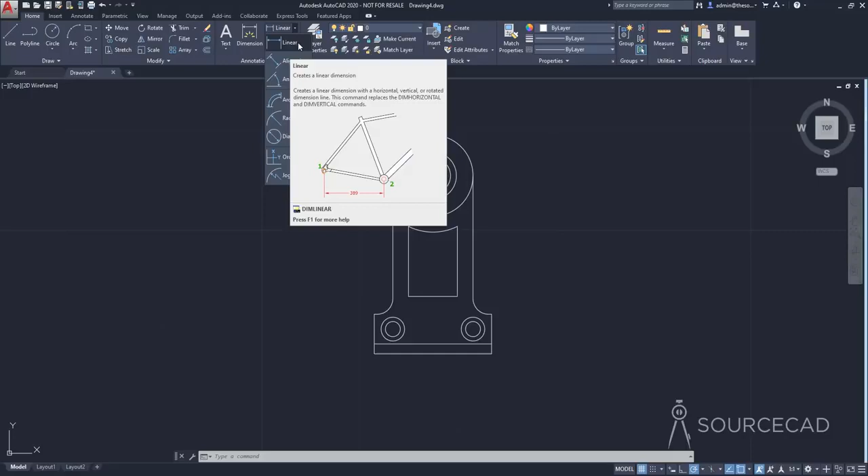I'll start with dimensioning because it's very important in any kind of drawing. To dimension this drawing which we made earlier, I'm going to go to the annotation panel, and right here we have the tools for dimension. You can use this dim tool or the dimension tool, or use any of these existing tools. I'll make the very first dimension using linear. I'll go to linear and add a dimension here. To add the dimension, all you need to do is select the first point, second point, and a point where you want to drop the dimension, and you'll have the dimension like this.

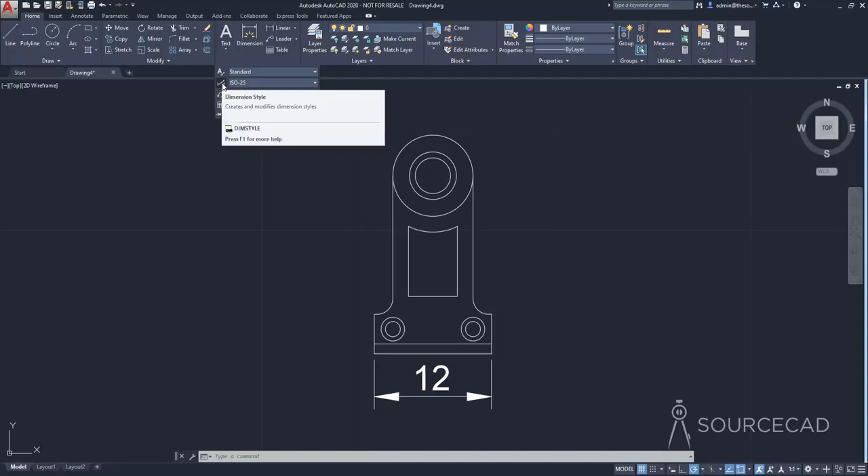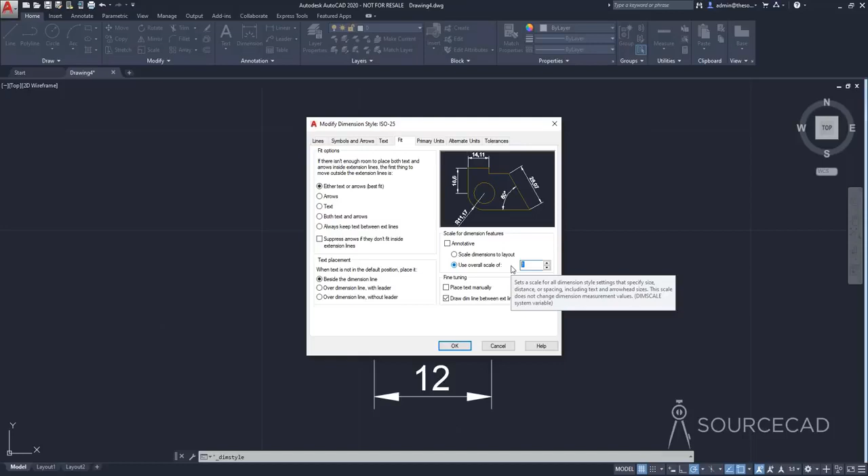Now this dimension is far from being perfect. It is very big, even the arrow size and everything else. If you want to modify it, you can do that using the annotation panel. I'll expand the annotation panel and click on this dimension style option, which looks like a dimension line with a paintbrush above it. I'll go to modify, then to the fit tab, and change the overall scale. That's the only parameter I'm going to change here, and it's currently 1. We need to decrease the size, so maybe I'll change it to 0.25 or maybe 0.2. OK, and close.

Now the size of the dimension is 0.2 times its original value, and this looks pretty good. Using this size, I will make other dimensions. In your case, the scale of 0.2 may work, or maybe you need to change it to some other scale. That depends on the drawing which you have selected.

Now this is the linear dimension. If you want to add a radius or a diameter, you can select radius. Go to radius, click on the circle, and click again, and you'll have the radius. For the diameter, select diameter, click on the circle, and now you'll have the diameter symbol. So as you can see, you don't need to add the phi symbol and the r symbol for radius and diameter yourself — AutoCAD will take care of this for you. In a similar way, we have angular dimension if you want to add angles. Here I'll select the first line, second line, and click again to add the angle. You can add these dimensions pretty easily like this.

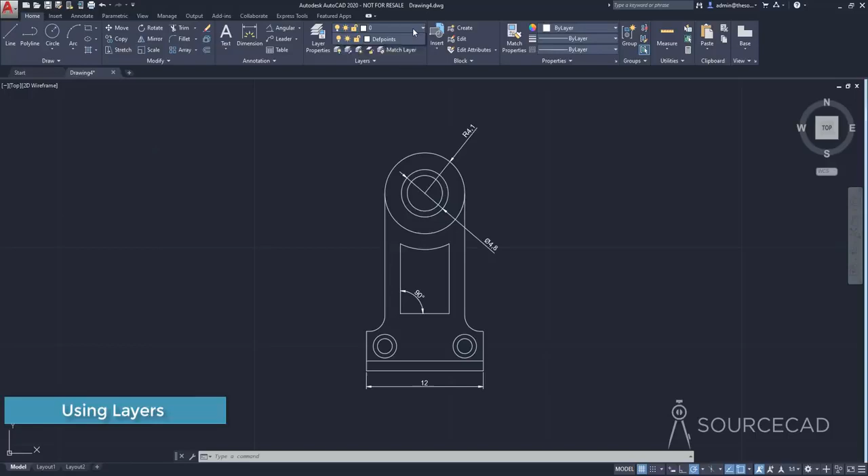Now after adding dimensions, let's talk about layers. Currently we are making our drawing on layer 0, which is the default layer. If you want to add more layers, you can go to layer properties and add the layers that you want. So we are working with layer 0, and as you can see, we have a check mark right next to layer 0, which indicates our drawing is on layer 0.

I'll click on this new layer and call it dim, short for dimension, and now I'll use this layer to put our dimensions. I'll close the layer property manager. I'll select all the dimensions I've made here, go to this dropdown, and select dim. Now all our dimensions are on the dim layer.

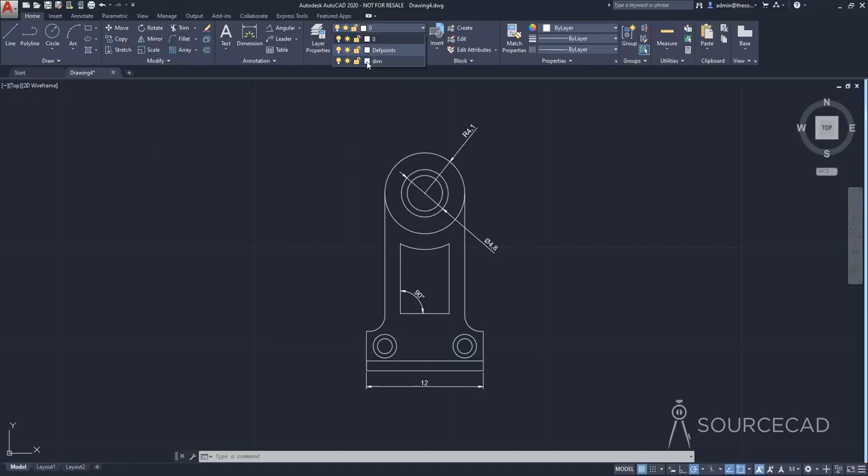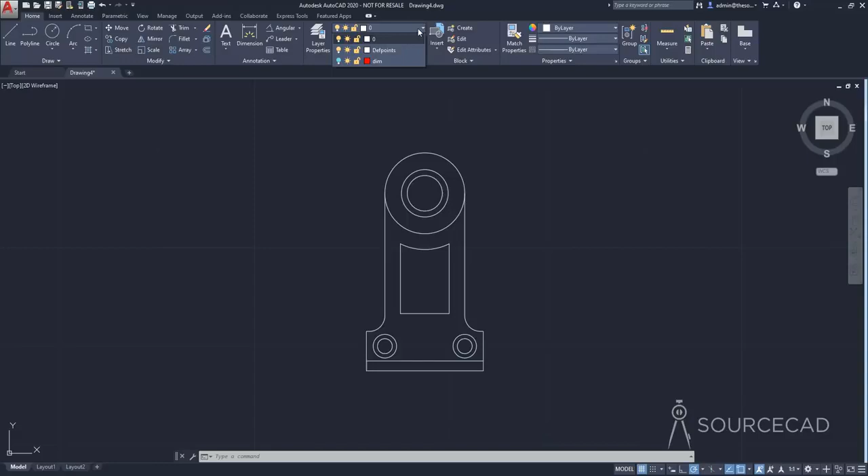So what are the advantages? Well, the first thing is you can change the properties, like the color, from here. I'll go to this white box, change the color of the dimension to red, click OK, and look at this — all the dimensions change their color to red. Also, if you want to hide the dimensions, you can click on this light bulb icon and the dimensions will simply disappear, though they are still in the drawing, just hidden for now. To bring them back, you can go to the dropdown and activate it again. That's the advantage of putting objects on their respective layers, so that you can control their properties using the layer property manager.

Now let's also talk about blocks. Blocks are symbols, and you can use these symbols in your drawing — they have their own set of advantages. So I'm going to make a simple window here using the rectangle tool, and also maybe use the arc tool.

So first point, second point, third point, then line, and again. Alright, so here we have a simple window kind of shape. Now in this case, all these objects are separate. They are made separately using different draw commands, but you can convert this into a symbol.

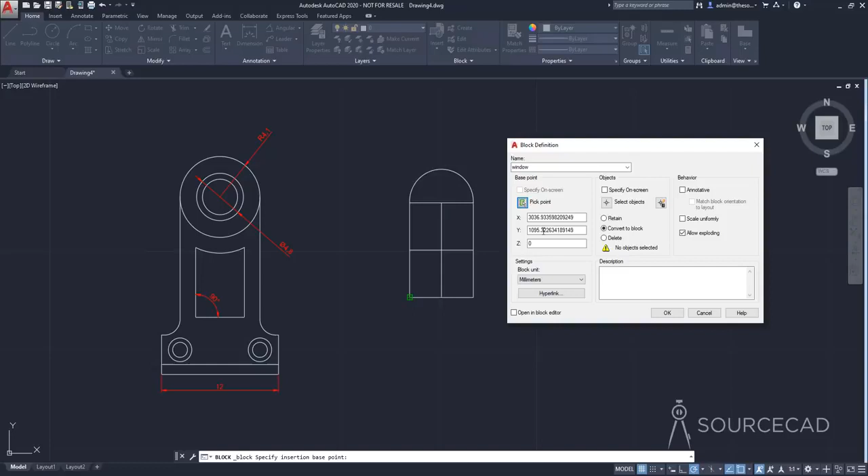And that symbol is called a block. Now to convert it into a symbol, I'll go to Create Block on the block panel. I'll give it a name, so let's call it window. Now we need to specify some parameters like pick point. Select this and specify a point that will be the base point or pick point of this symbol or block. Now select objects, click on this box and select all the objects and press enter.

And I'll simply click OK now. And now if I hover my cursor, it will show this as a single object. If you select it, it will only show the pick point or base point which we specified, and now this one will work like a single object.

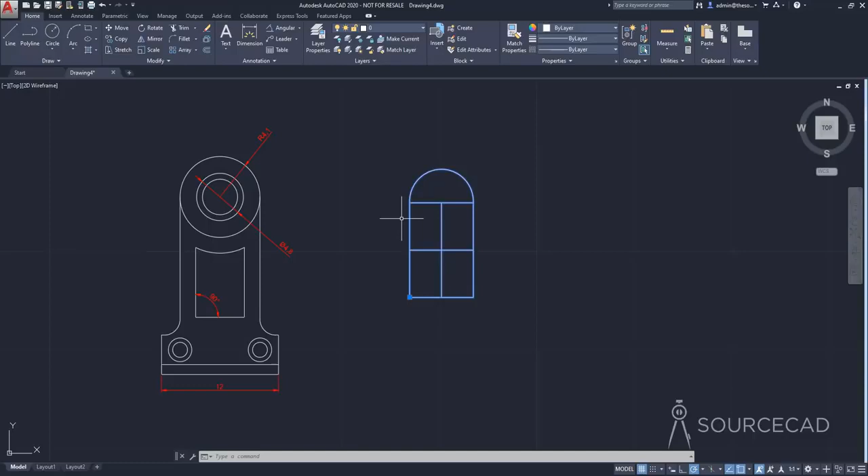Now what's the advantage of this? Well, if you go to Insert, you'll notice that we now have this window added here, and you can insert as many copies of this window from here, or you can also make copies of this block from here. Now, all these blocks can be modified directly by modifying any one of these block references.

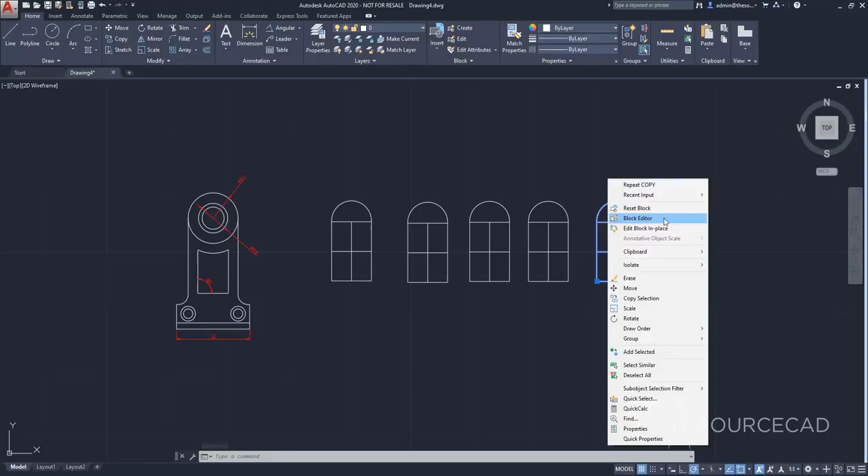So maybe I'll just select this block, then right click and select Block Editor. So this is the place where you can modify the blocks. Look at this, now this is the block editor. As you can see, we have a tab here, and here it will work again like separate objects.

Here I'll modify this. So I'll go to circle and add a circle maybe here. Then I'll go to trim, enter, I'll trim this line and this line. And we have a different kind of window now.

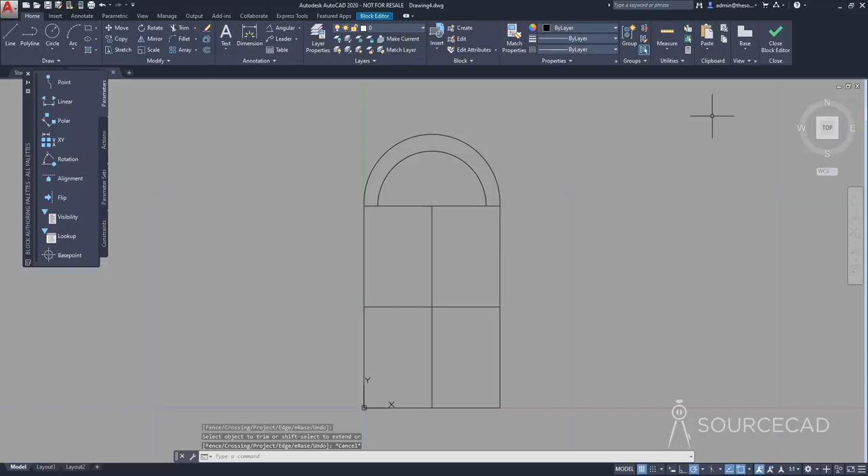I'll go to close block editor, save the changes, and look at this, all the blocks now modified. So that's the advantage of using blocks over simple copy paste of symbols. It can modify all the references, just by modifying the actual block.

So we have our drawing, and we are pretty much done with the basics of AutoCAD, and now I believe you are familiar with the tool sets required for making your own set of drawings. Finally, after making any kind of drawing, you would definitely want to plot that drawing, and plotting is also pretty straightforward in AutoCAD. So let's finally learn about plotting our drawing.

Now to plot our drawing, I'll go to this plot option, and here I'll specify firstly the plotter. In this case I'll select DWG to PDF, since I want to plot my drawing as PDF. Now for the paper size, you can select from any of these existing paper sizes. In this case, ISO A4 is selected, I'll keep that one. Now for the plot area, Display is selected.

That means whatever is displayed will be plotted. In this case, I'll change that a bit, I'll change it to Window. We want to plot everything inside a selected window. So now I'll click here, and I'll click here, and now all the objects inside that window will be plotted.

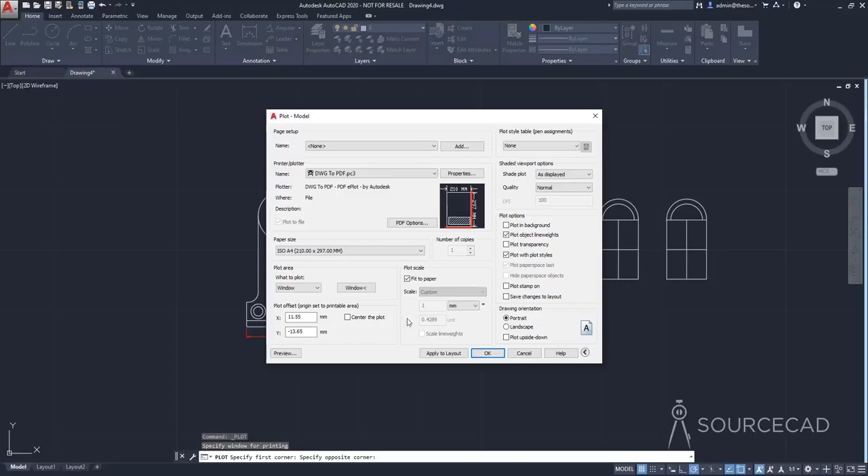All right, now look at this paper. So this is how your plot's gonna look like. This is our paper, and your plot will be somewhere over here. So we have a problem here, this area is completely blank. We just want it centered. So to do that, click Center the Plot, and now this will be centered like this.

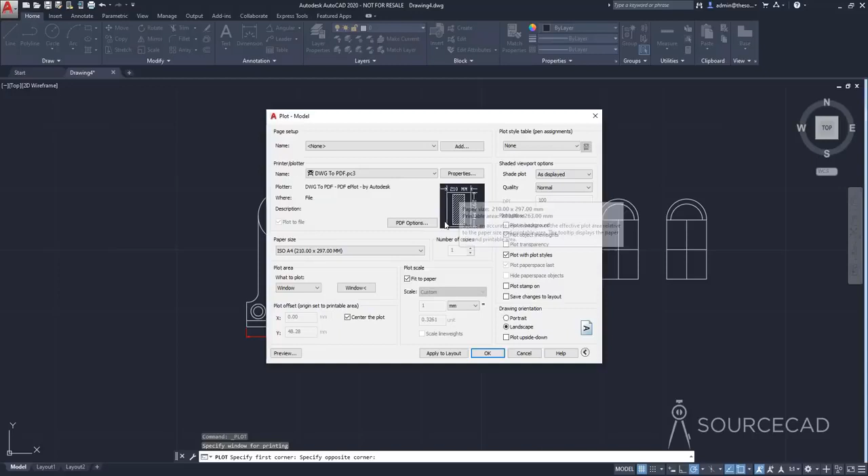Again, we have a problem. This is in portrait orientation, whereas we want it in landscape. So go to drawing orientation and select landscape. There we have it, it's now changed. All right, now click OK, specify the location and save it. And here is the final output in PDF format.

It's pretty easy and straightforward.